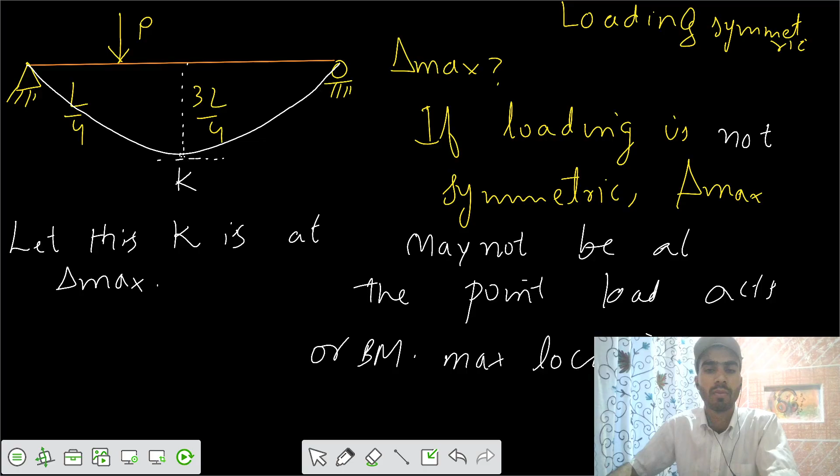delta is maximum. So if we make the BMD of this diagram, we can say this is the BMD of this diagram. So this is PAB by L. The equation is PAB by L. आपका A and B equals to PAB by L. That is 3PL by 16. And if you want to make the M by EI diagram, इसको डिवाइड करते हैं EI से।

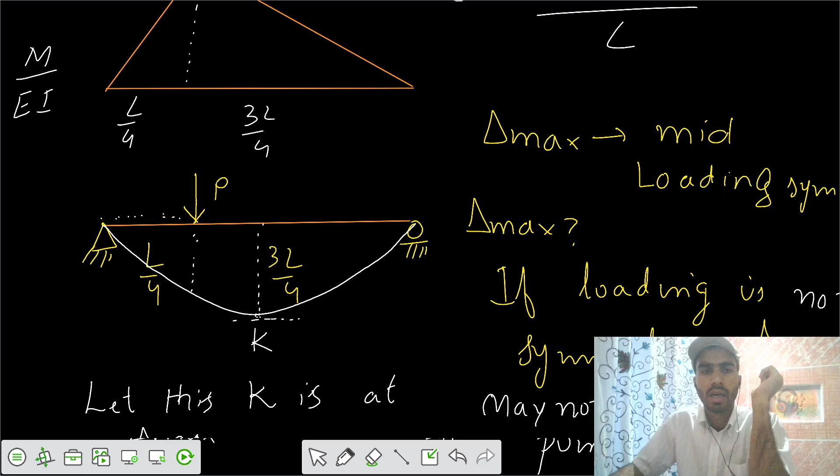So if we take that, let this point K be at a distance of x from this side. If we say यहाँ से कोई x पे आपका पॉइंट K होगा, then let's calculate the value of the BMD, M by EI value, at this point K.

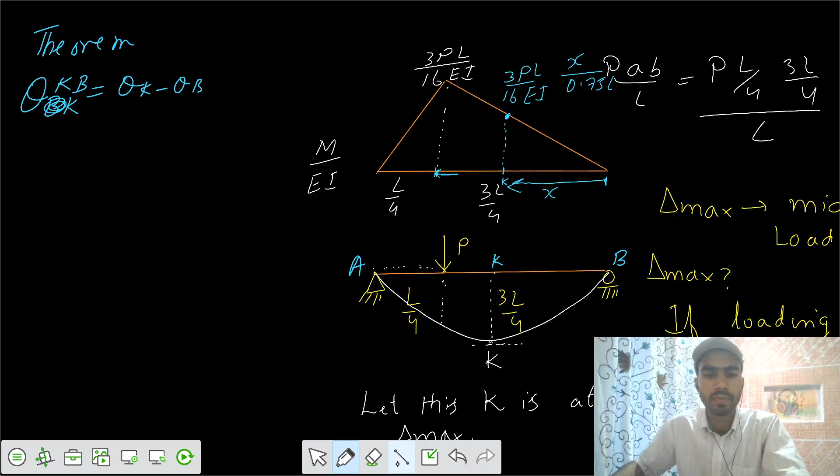Yeah, we can say theta. You draw a tangent from B, so this theta means theta K minus theta B. You can say it is theta at K with respect to the tangent drawn from B. Let's say we are drawing a tangent from B, देखते हैं क्या होता है. So if we make a tangent from B

such that this value is theta B, और at the location of point K theta would be 0 because delta maximum is there. तो theta is 0 because there the curve changes its path. So we can say this is theta at K with respect to the tangent drawn from B.

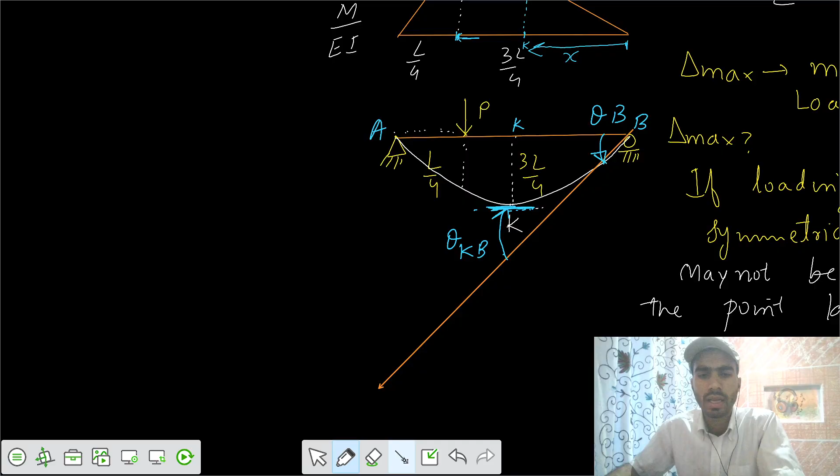Similarly, if we ask what's the area between the two points, theta K, theta KB, that's the area between the 2 points, and we can get the value that equals the area between the 2 points. That's the area, ये वाला area जो है ये आपको calculate करना है. तो we can say this is 1/2 3PL by 16 EI, and you have x into 0.75 x by 0.75 L, and आपका length जो है x मीटर. तो ये आपका 1/2 perpendicular into base, that's your area.

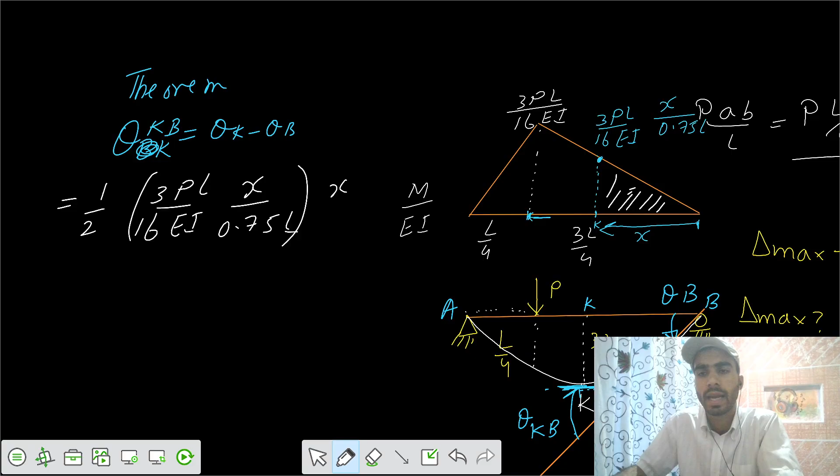But we don't know the value of x. How can we get the value of x? अगर आपको x पता चलेगा तो we can get the delta maximum. So we need to get the value of x anyhow. आपने theta KB find किया, but we should get some relation, and if we get one more relation, we can easily get the value of delta maximum. तो मैंने tangent डाल दिया, तो is there any possibility that we can get any relation?

See, I draw a tangent from B. What is the name of this delta, what can I call this delta? इसको हम कहते हैं delta at A with respect to the tangent drawn from B. What's the relation? In this triangle we have formed, delta AB, A with respect to B, equals tan theta, and because theta is small, tan theta equals theta. That's L theta B. ये आपका theta B है, and this is L, so we can say L theta equals delta AB.

So we got theta KB. We know that theta K is 0 actually. So theta B would be equal to minus theta KB. If we take the magnitude only, then we can say delta AB equals L times theta B magnitude. So we need to get delta AB. Deflection at A with respect to the tangent drawn from B equals area times centroidal distance from A. तो दो triangles का centroid देखना है, और उनको area से multiply करना है, then we can get delta AB. So let's calculate delta AB.

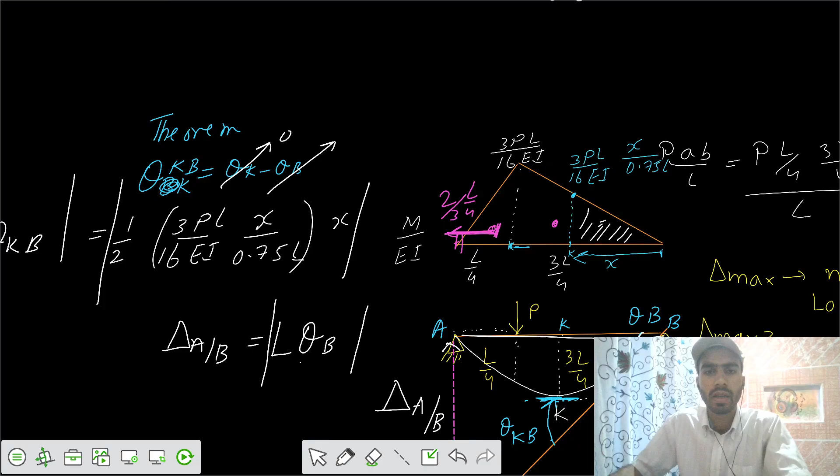But delta AB equals L times theta B. And we know that theta B magnitude equals 1/2 3PL by 16 EI and x square by 0.75 L. So we can write 5PL square by 128 EI equals 1/2 3PL by 16 EI and x square by 0.75 L. So we can get the value of x. x comes out to be root 5/4 of L, or 0.559 L.

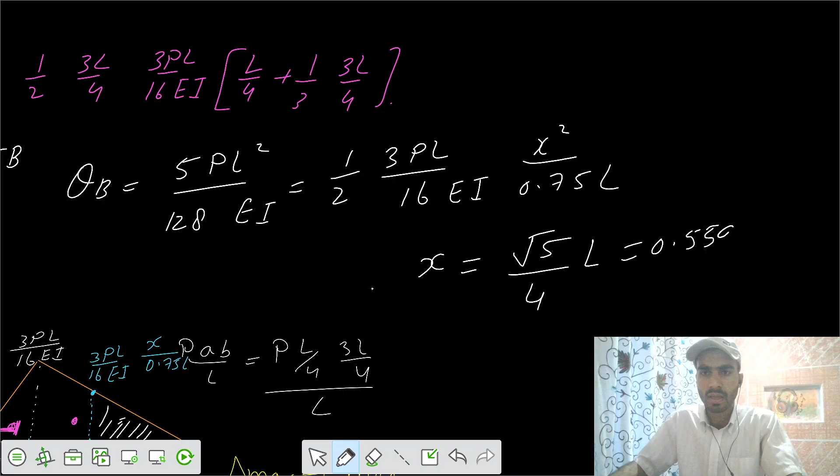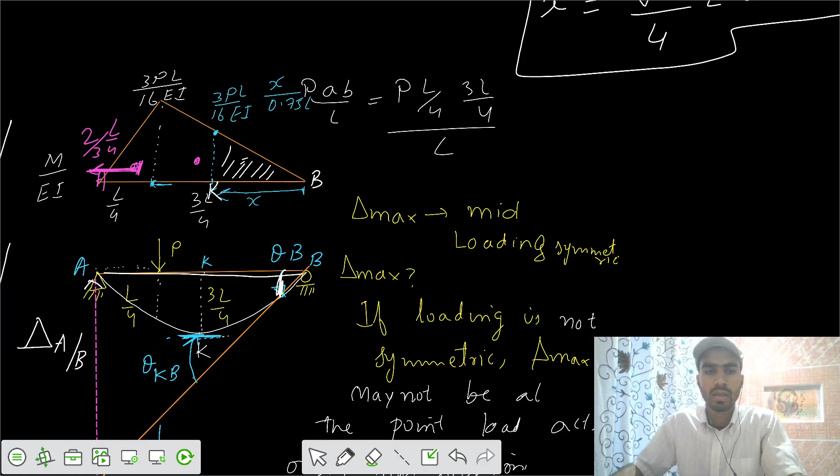0.559 L. So we got this value: आपका जो k पॉइंट है वो पॉइंट reference सपोर्ट B से at a distance of 0.559 L पे होगा, तो आपका delta maximum would be there and theta would be zero there. So to get the delta maximum now, we can say delta maximum.

We can now calculate: say you draw tangent from B and you say what's this value. You can say this value is delta. Can you tell me what is this total value? We can say this value comes out to be equal to delta at K with respect to tangent at B, but we don't need this value. Actually we need only this part, delta at K or delta max.

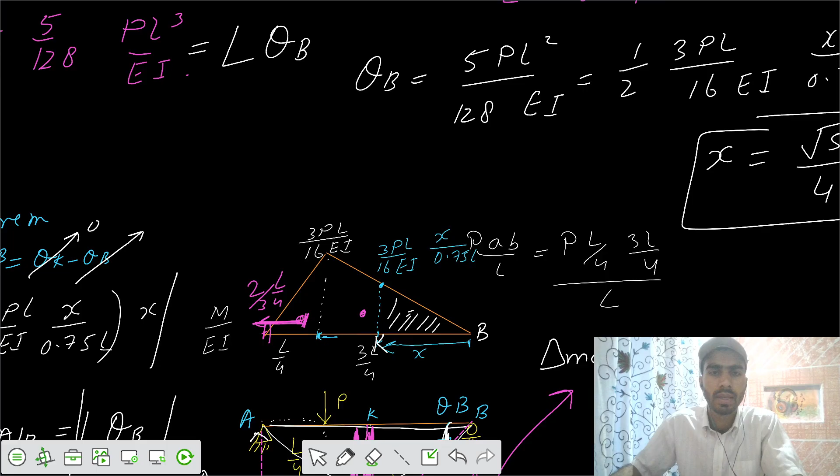तो इसको find करने के लिए let's make this deflection diagram again. Let's say this was the load at L by 4 and there was support B, this was A. So आपका K value is at 0.559 L, so this is length X, 0.559 L. तो यहाँ पे point K है, so can we say that theta here is 0? Here the theta is 0.

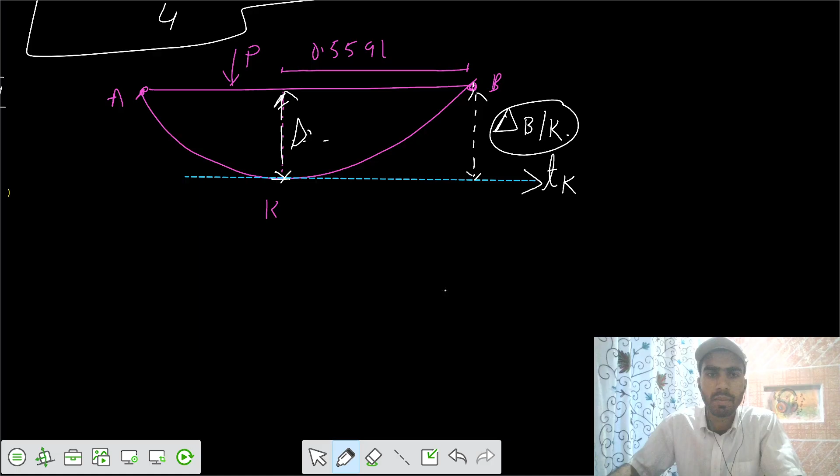If theta is 0 here, we can draw tangent from K and get the value of this one. We call this value delta, deflection at B with respect to tangent drawn from K. If we calculate this deflection at B with respect to K, that's also equal to delta max. So you need to calculate delta BK.

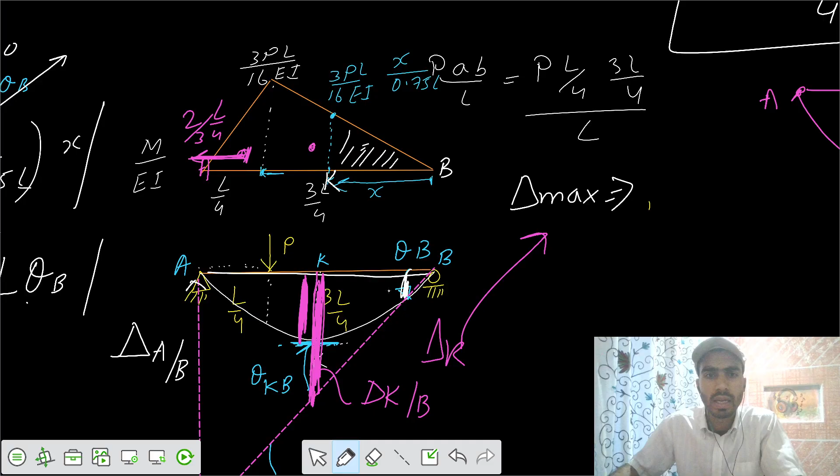For that, use moment area method, theorem 2. From this M by EI diagram, we need to get the value of delta BK. Delta BK equals area between the 2 points times centroidal distance about point B. So let's say this is the centroid, and this is the distance x_B bar. So we need the area of this triangle.

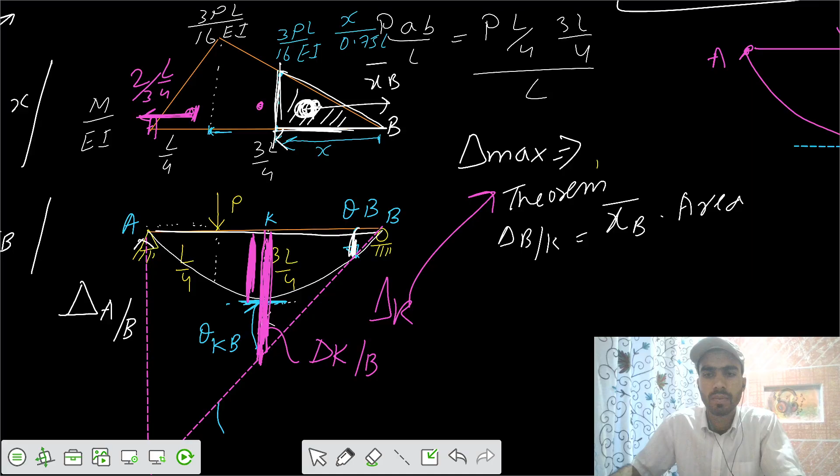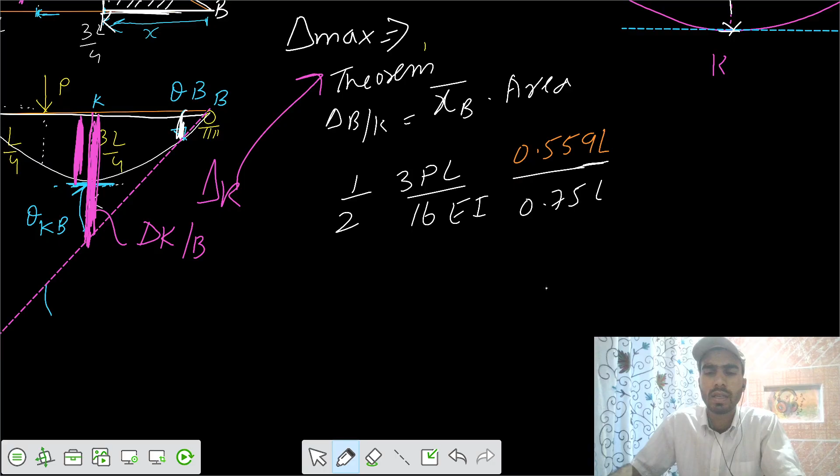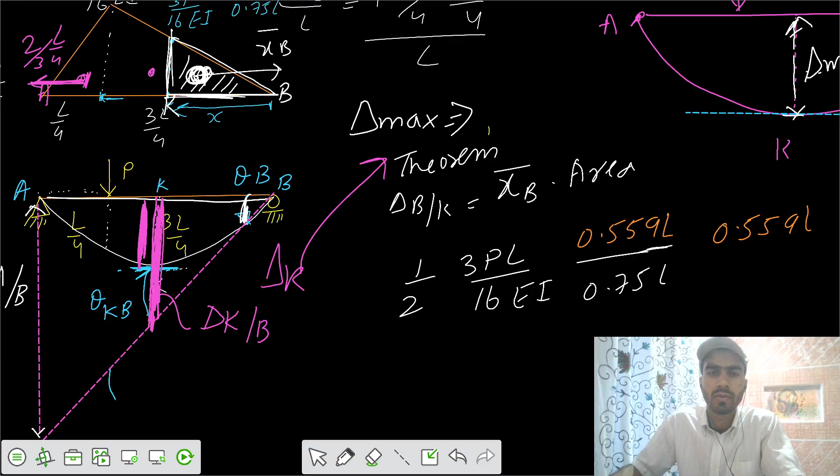We have the area of the triangle, 1 by 2 times 3PL by 16 EI. This was for length 0.75 L, but we have to get the value for x. X value आपका 0.559 L, then we multiply it with the length that is also 0.559 L. Then we have the centroidal distance. This is our area, with x equals 0.559 L.

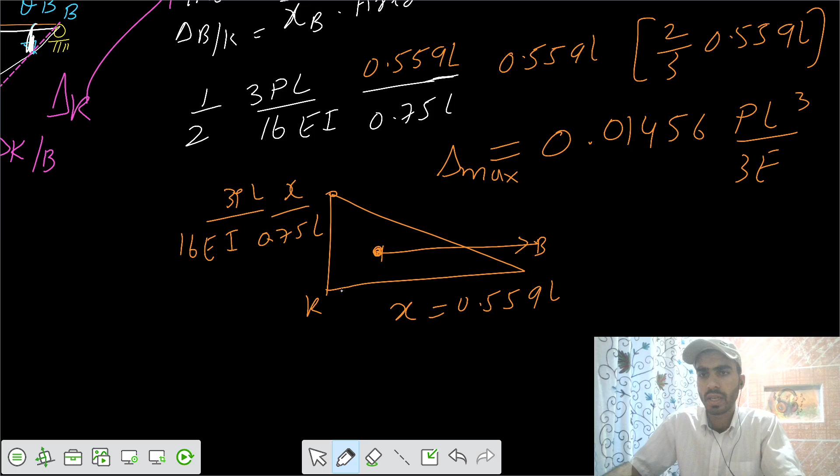यहाँ पे peak है 3PL by 16 EI, and you multiply by x and divide by 0.75 L. Then we have the centroid up to point B. This is point K, so the centroid is at a distance of 2/3 of 0.559 L. Finally you calculate and get delta maximum equals 0.01456 PL cube by EI. So this is the delta maximum.

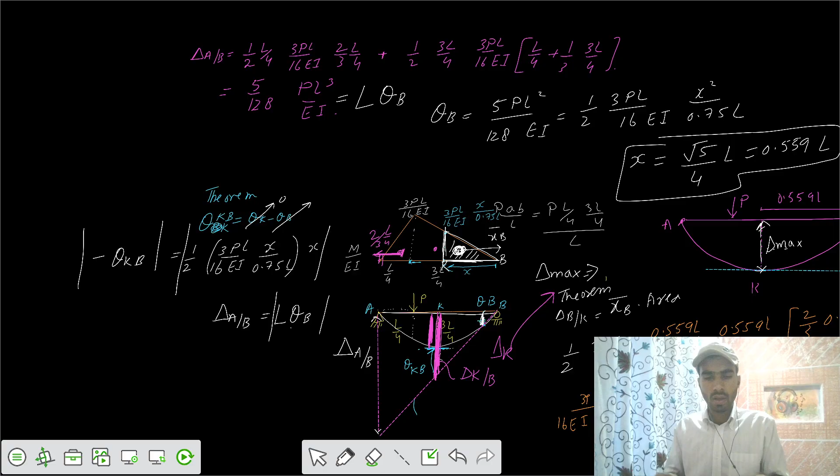I hope you got the problem concept fully. Let's take one more problem. You have a 14-meter beam. यहाँ पे support A and support at C, and a point load of 30 kilonewton acting at the free end, point D. We need to get delta at D, यानी D पे कितना deflection आएगा. Let's say this is 4 meter, ये 6 meter है और ये 4 meter.

Firstly you need the M by EI diagram, so we can see what the deflection profile looks like. Let's calculate the reactions. By summation of Fx and Fy, A plus C equals 180, and summation of moments about C equals 0. Then A equals 78 kilonewton and C equals 102 kilonewton. Since there are only point loads, it's easy to draw the BMD directly without a shear force diagram.

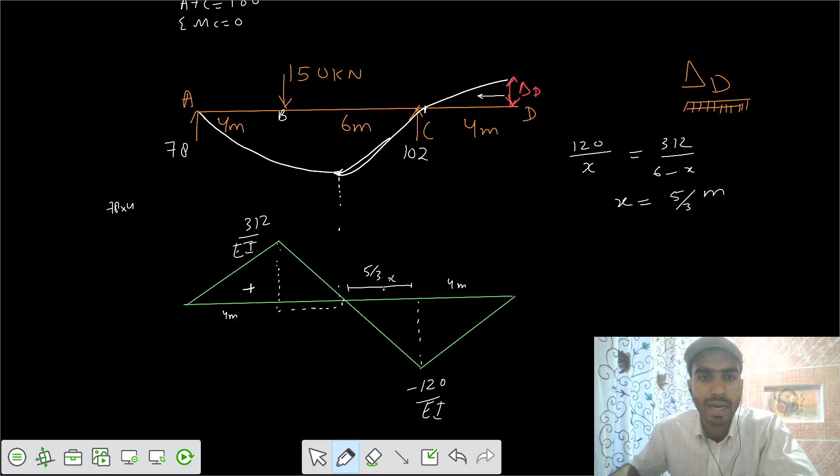So finally we need to get the value of delta D. So this is the delta D. So how can we get delta D? If you draw tangent from any point, see we don't know where delta maximum is. So if we draw tangent from here, theta at point A is also not known.

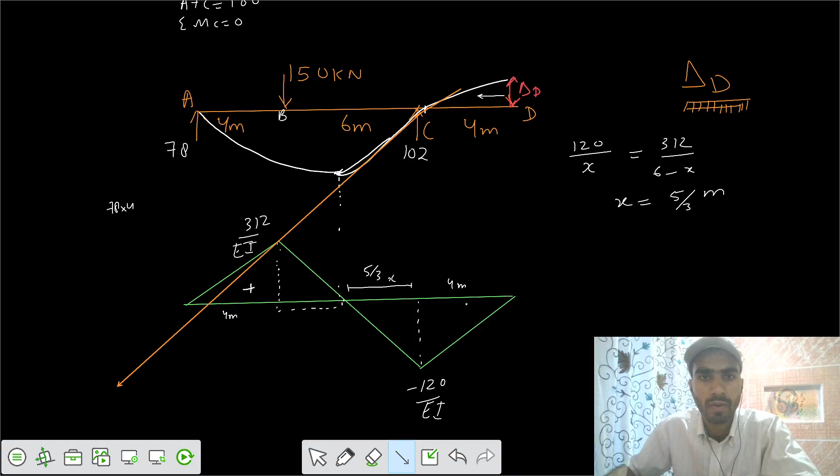And if you draw tangent from, say, we don't know this location where the theta is 0, or delta is maximum. So if you take one point common between the two spans, that's point C. If you draw tangent from C, there might be some relation between the two spans. So let's draw tangent from C. This is the tangent drawn from C.

So if we say what's the deflection value of that, we will call this value this deflection value, and we have one more deflection value, this one. This value is the deflection at A with respect to tangent drawn from C, and this value is the deflection at D with respect to the tangent drawn from C. So point D has reached here. So from that point we say deflection at D with respect to tangent drawn from C.

We can get these two values. If I know what is the total value of this one, let's call it alpha. If I know alpha, we can get delta D. So we can write delta D equals to alpha minus delta DC. So somehow if I get alpha and delta DC, you can get delta D, the deflection at D.

So the deflection at D with respect to C is easy. We can get that from the area between the two, and the centroid distance from point D. That's easy. So let's calculate that part first. That's very easy now. Let's go for that.

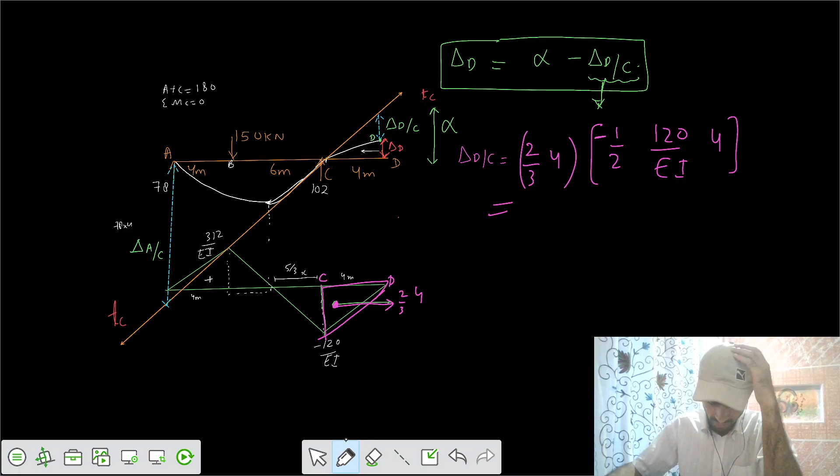So this was point C. So this is the area between the 2 points, and the centroid is acting here. So finally delta DC equals this value, but overall value is negative. You can keep the negative sign also. So you can calculate it, delta DC comes out to be equal to minus 640 by EI.

Negative means that point D, delta D, means point D is below reference point C. But in the diagram, actually point D has reached upwards. Can you see that? Delta D has reached upwards when we made the diagram. That means the direction you assumed is not correct for that point D.

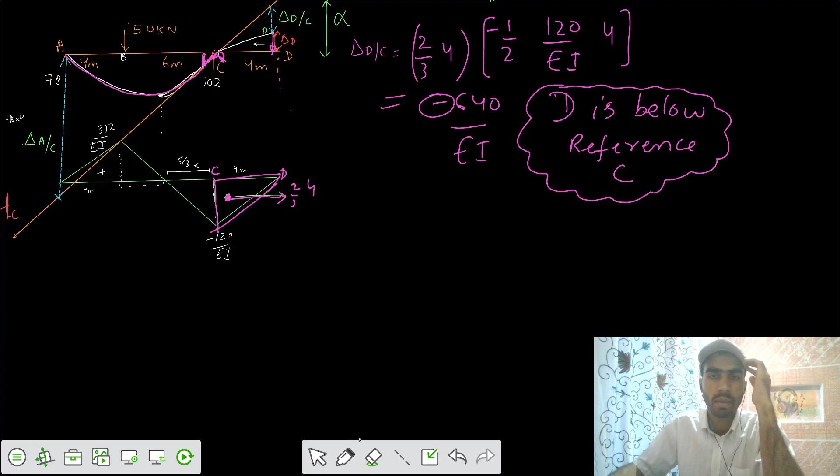So actually it should be deflecting in this fashion, to maintain the slope, theta left equals theta right, but it would deflect downwards because there was some point load here. That's why negative has come here. But for calculation analysis, we say that delta should be upwards, then we draw tangent from both the points to get the value of delta. So finally, D is below reference point C. That means deflection at D is downwards by an amount of 640 by EI. Did you get this?

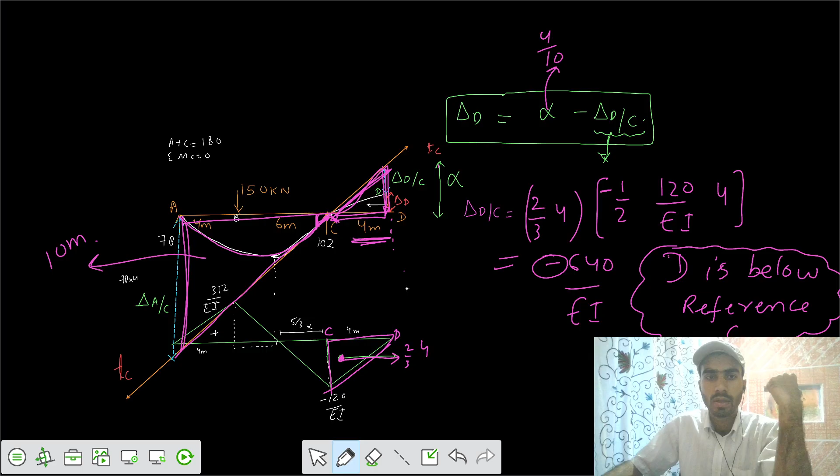Now finally we got delta DC. What should be the value of alpha? See, we have two similar triangles: this triangle is for 4 meter, and this same triangle is for 10 meter. So alpha is 4 by 10 of delta at A with respect to point C. So we need to get the deflection at A with respect to C anyhow. So we need to calculate delta AC.

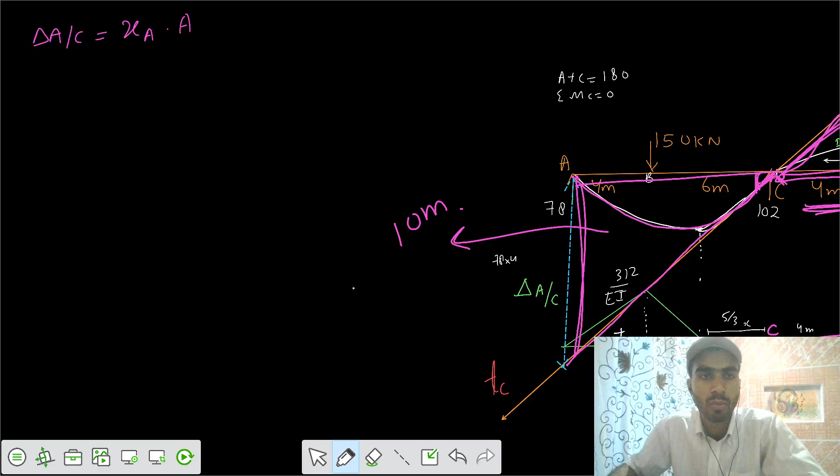Calculating delta A with respect to C. That's moment of area about point A into area. So we can see how many areas we have about point A between A and C. We have one area, next one, and next one. 3 areas we have. This is negative area. This is positive. So let's take this one as centroid 1, this one centroid 2, this one centroid 3.

So we get centroid 1 at a distance of 2/3 of 4, and the second centroid is at a distance of 4 plus this one; the first one is 5 by 3, so this is 6 minus 5 by 3. That's 18 minus 5 by 3, 13 by 3. We can write 1/3 of 13 by 3. Then we can get the value of third centroid from point A. We can directly say the overall length up to here is 10 minus this distance, which equals 1/3 of 5 by 3.

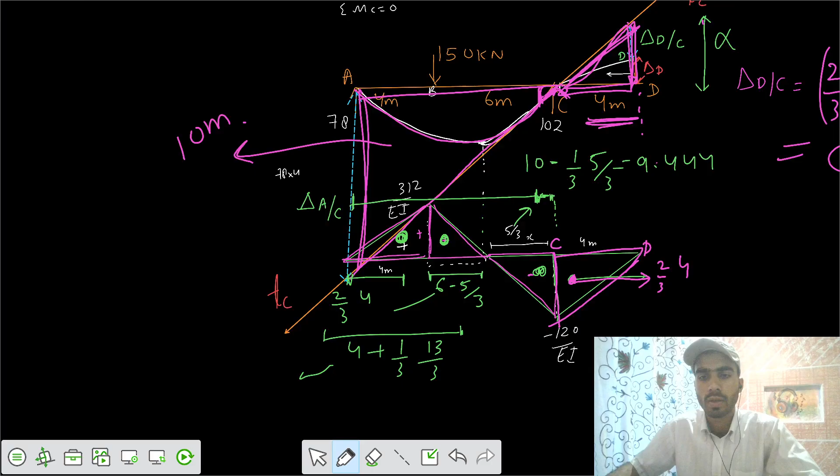So finally we got this value, this one, and we have this one and this one. So इनको substitute करते हैं, and we multiply with the area. So first area we can calculate 1 by 2, 312 by EI for length of 4 meter. And centroid act करता है कहाँ पे 2 by third of 4, that's 8 by 3, 8 by 3 plus next area 1 by 2, 312 by EI into length.

How much length is this? This is 6 minus 5 by 3 total length. So we can write 13 by 3. So the centroid is acting at 4 plus 1 by third of 13 by 3. This centroid. And third one, after that we have next area, that's negative area, negative triangle, that we can write 1 by 2, minus 120 by EI, and length is 5 by 3, or the centroid is acting at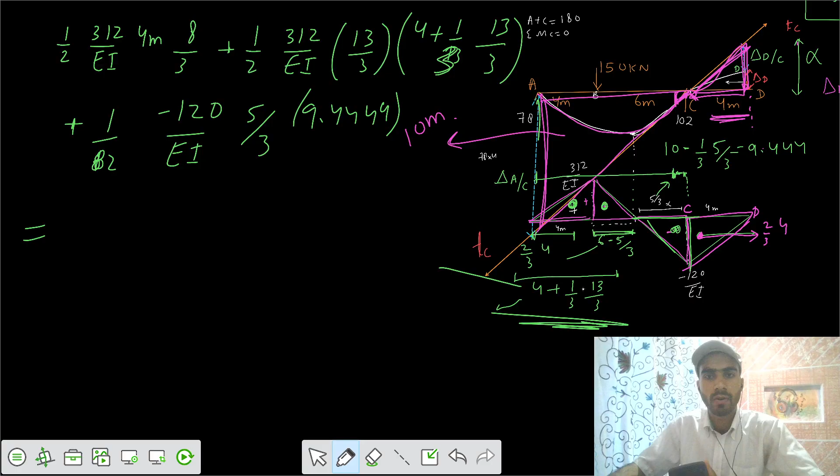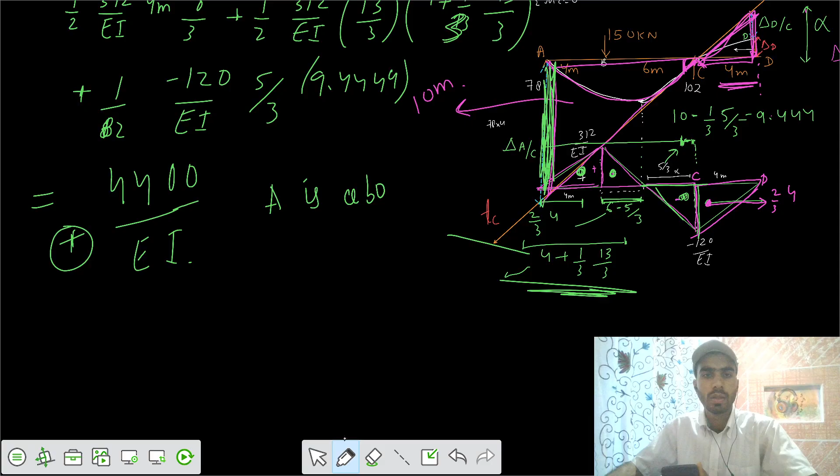9.4444. So finally you substitute the values and you can get the value of delta at A with respect to the tangent drawn from C. This value we can get equals to 4400 by EI. 4400 by EI. Positive here. That's point A is above the tangent drawn from C, above reference point C. The tangent drawn from C is down, and point A is upwards.

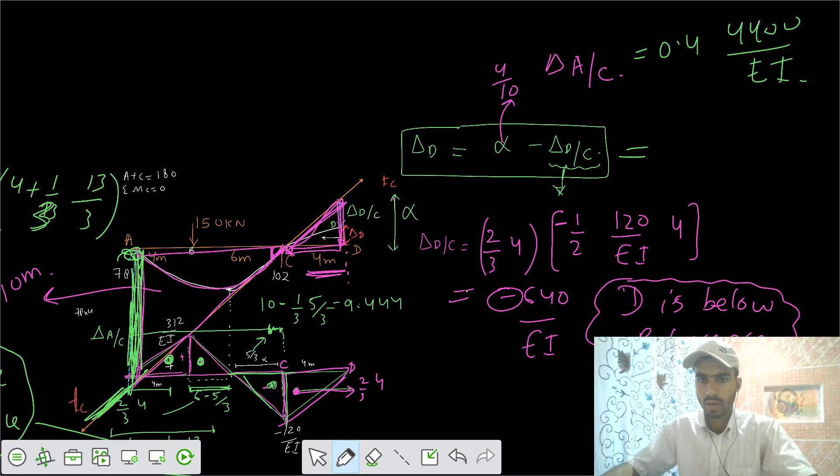So from the similar triangles we can say now the value of alpha is equal to 0.4 of the value we got, 4400 by EI. And finally delta D equals the difference of the two. So finally your delta D comes out to be equal to 1120 by EI, positive. So this was a very good problem.

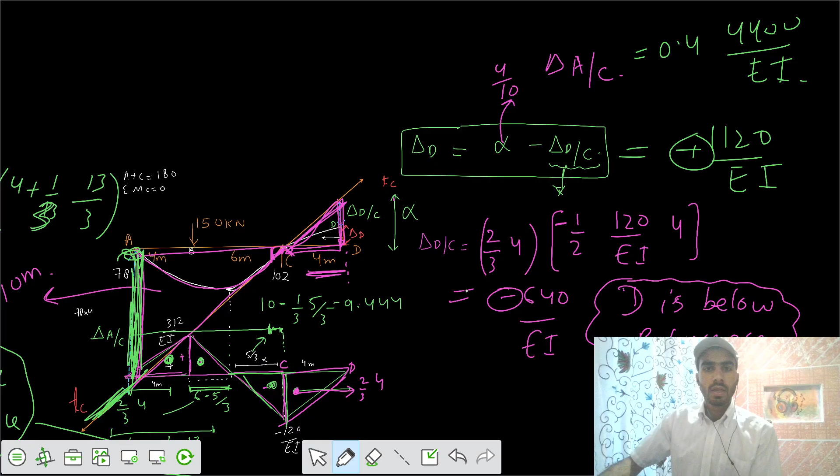We can calculate this same problem by another method. Let's keep this problem aside for now. We can solve this problem again by using a different method. Now next one is the same method I was telling. This method is called moment area method. But it is moment area method where we do BMD by parts, bending moment diagram by parts.

Say you have this beam, दो मीटर तक आपका UDL एक्ट कर रहा है, और इसके बाद 1 मीटर that's free. So we have 300 kilonewton per meter acting. So we can get the reactions at point A and point B. After calculating, reaction we have 200. This one is 400 reaction.

So let's say we want to make bending moment diagram. In this part there would be linear variation. After that, there is a decrease in BMD because SFD is downwards, so we have some 2-degree curve. Let's keep this 2-degree curve, and this is 1-degree curve. So this is your BMD. If you divide it by EI, to calculate the centroids and area, if calculation of area and centroid is difficult, we go with this method.

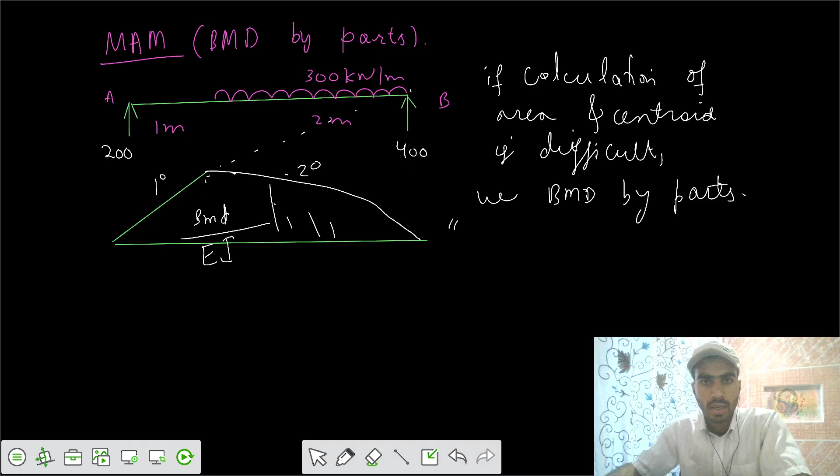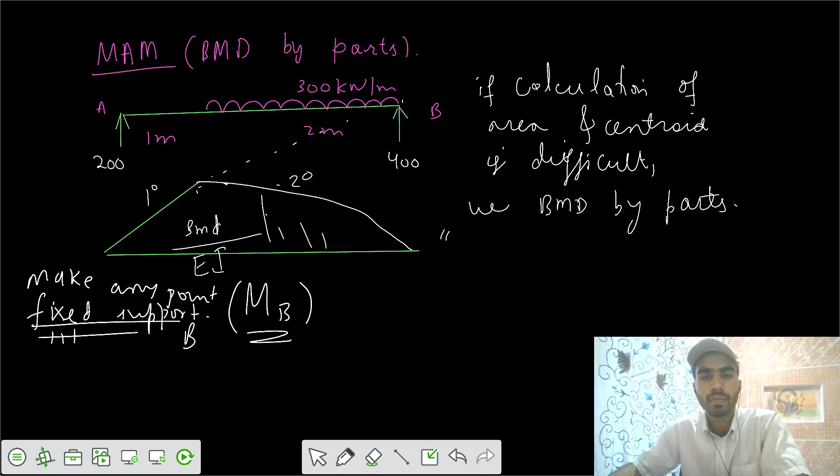So it says make any point fixed, fixed support, इसको fixed बना दो, फिर वहां पे आपका मोमेंट कैलकुलेशन करना है. Let's say point B, we calculate moments about point B. So let's make point B as fixed. So this was the same beam, but you made point B fixed.

Point B fixed. Then what is the effect of this point load 200 upwards? That's the reaction. If load is upwards, the moment developed would be clockwise. That's positive moment, and that equals 200 into length L. That's 600. And if you divide by EI, you get M by EI diagram. Then you join the 2 points by straight line. So this is your first M by EI value about point B.

Similarly, you have a UDL also. This UDL is acting after this span, 2 meter span. If you want to say what's the variation of this, because this is UDL, we had parabolic variation this way.

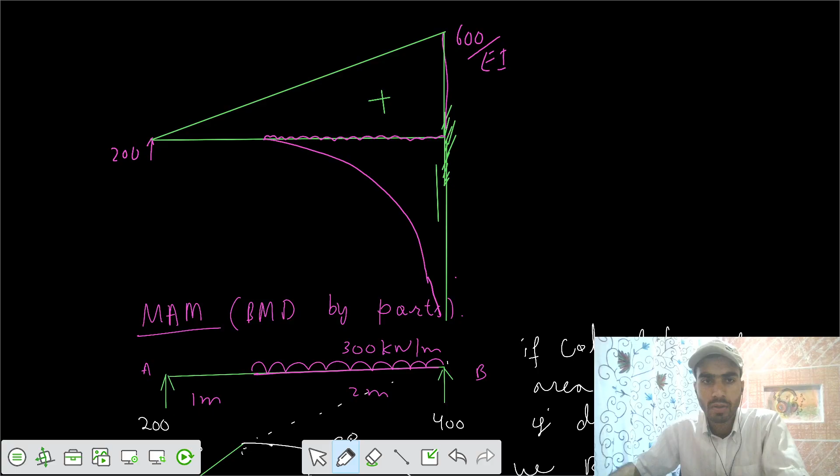We can say this value equals WL square by 2 or WX square by 2, where W is 300 and X is 2 meters, on which this UDL is acting. UDL 2 meter pe act kar raha hai, so 300 into 2 square by 2 equals 600. But it is negative. The concept behind making any point fixed is that moments should be balanced about that point, or the moments should be the same.

Point B was a simple support, to yahan pe moment aapka 0 hota hai. Moment at a simply supported beam at the end is 0, so moment at B equals 0. By this method also, the final value of bending moment at B is 0: one is positive 600, the other is negative 600. So now calculation has become very easy.

This is area 1, its centroid is here, and this is area 2 with its centroid here. Area 1 is 1 by 2 into length 3 meters into 600 by EI. Area 2 is 1 by 3 of 600 by EI for a length of 2 meters, but it's negative. So we get areas directly, and the centroids are L by 3 and X by 4. That is how this method works.

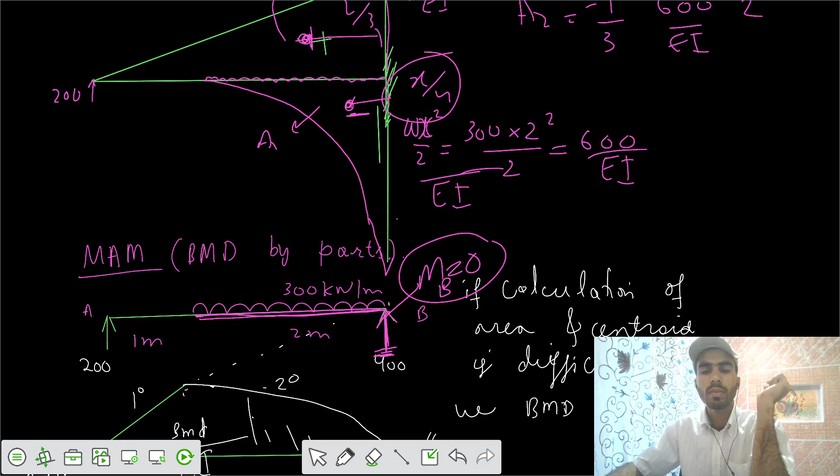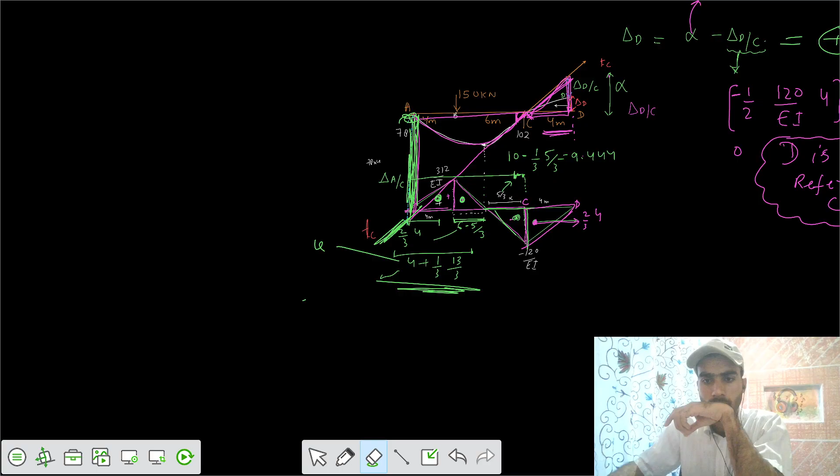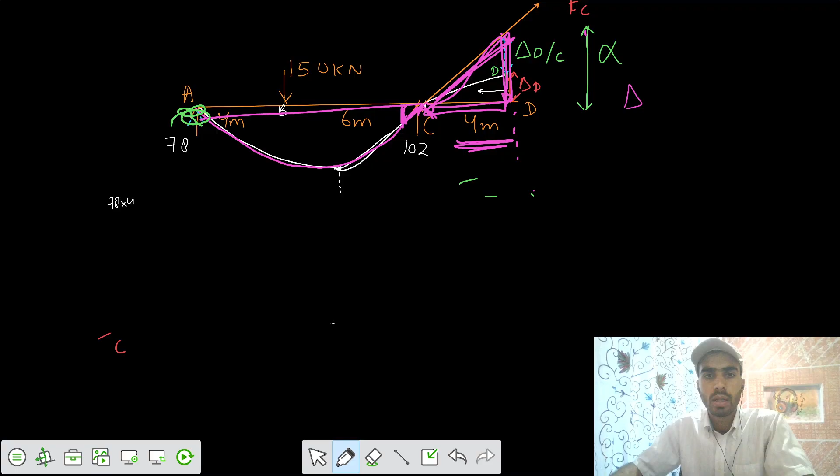Now let's see the previous question we did, and do its calculation in the same way. Let's make point C fixed, because at point C we drew the tangent, and we got relation 1: alpha equals 4 by 10 of delta at A with respect to point C. So we make point C fixed from both sides.

From here the reaction is 78 upwards. Then you have 150 here and 150 here. Doing separate calculations, 78 into length of 10 meters is 780, and similarly from here 150 into 6 meters is 900, negative. So we write 780 by EI, positive value. This part is also linear variation: 150 into 6, 900 by EI.

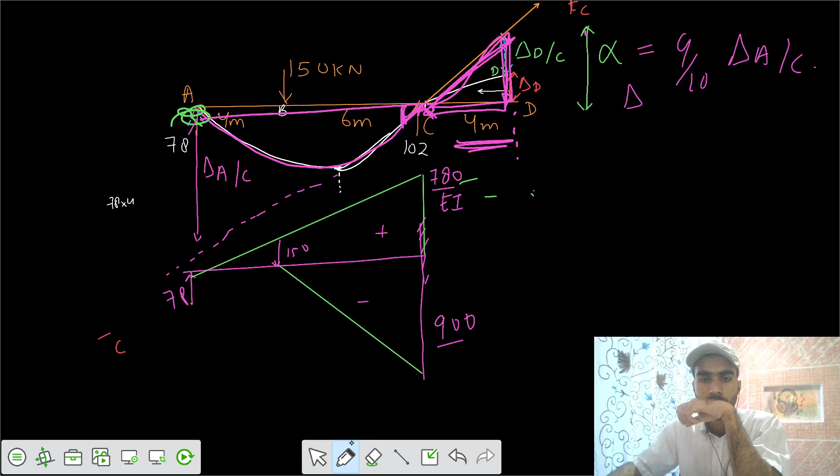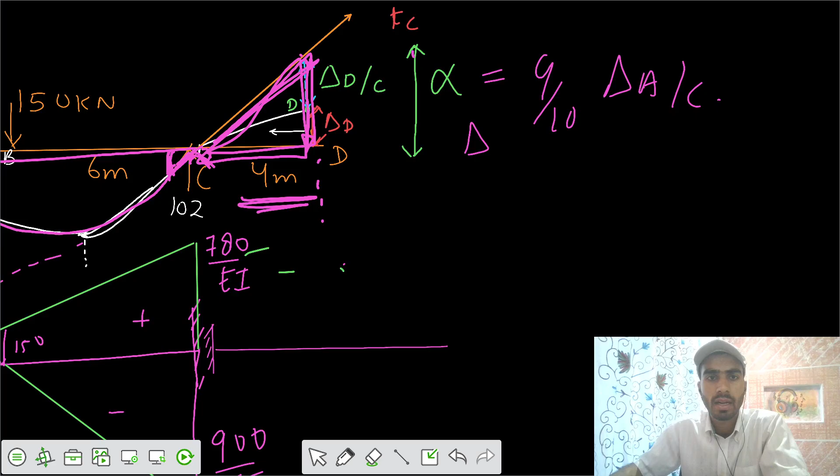Similarly, make point C fixed again, but calculate from the right side. A point load was acting at D, 30 kilonewton. Its effect is an anticlockwise moment of 30 into 4, that's 120, so minus 120 by EI.

Now to calculate delta at A with respect to C, take point A and point C and calculate the area between the two points: area 1 and area 2. Area 1 into its centroid about point A, and area 2 into its centroid about point A. So we finally get delta AC.

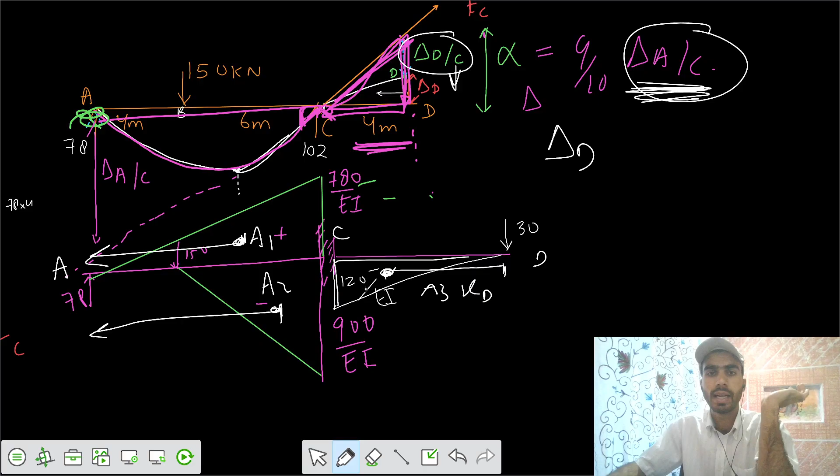Then we need delta DC: get the area and its centroid, and multiply about point D. This is area 3 into XD. So finally we get delta D. This is a very important method when calculations are very lengthy.

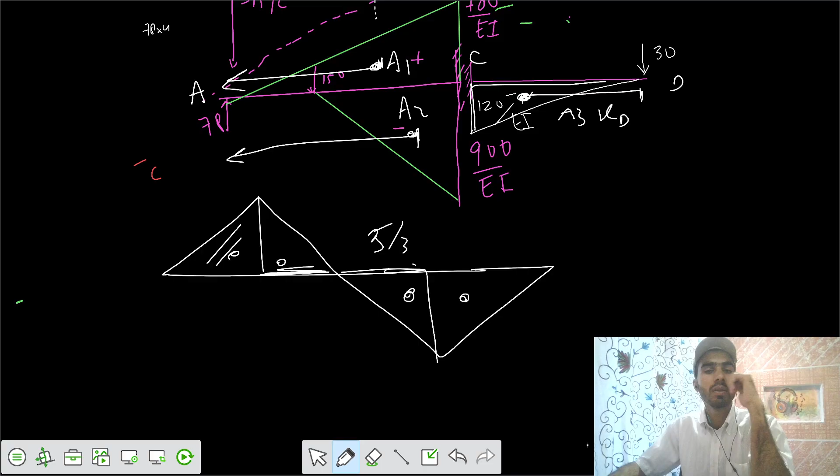In the previous part we had a bending moment diagram like this. You needed area 1, then the length, 5/3, then each centroid. It took a lot of calculation, and this method minimizes those calculations when the bending moment diagram area is difficult to find or the centroid calculations are lengthy.

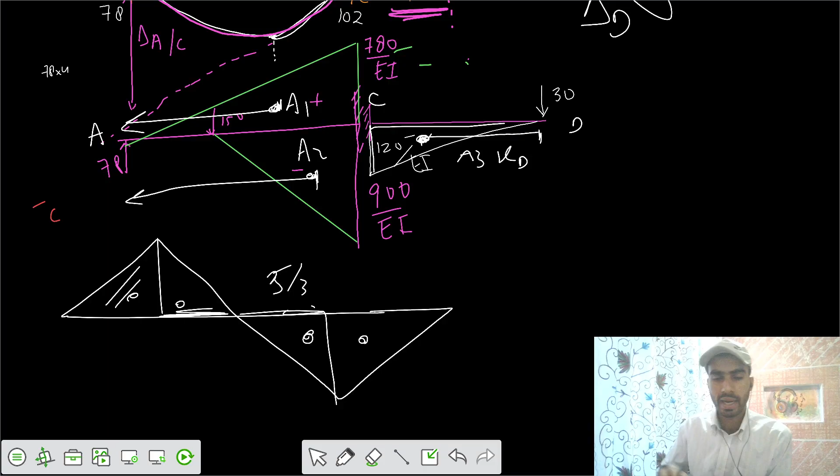Let's do one last problem on the moment area method, using the same concept of bending moment diagram by parts. You have this beam.

Uniformly varying load after length L/2. So this is length L/2. This is also length L/2. Uniform load acting, uniform load. So this is your W. Okay, this is W.

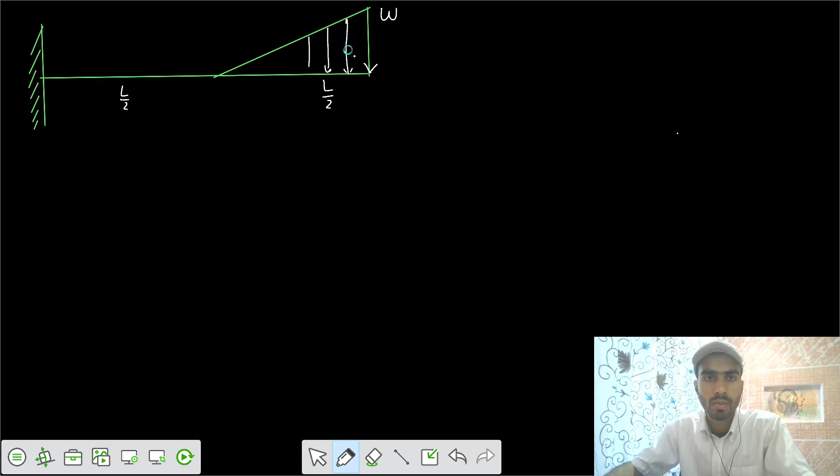So yesterday at the end of the lecture we saw that you had this one, then iska value of bending moment diagram, that's somewhat this way. We know that WL square by 2 divided by EI. Then we have centroid also, we know centroid also. Similarly for this one also, then we say iska bhi value kuch hai WL square by 6, I think ऐसा कुछ होगा. And centroid we can say this is 2 degree, this is 3 degree.

Then we were having this problem, ये वाला problem था आपका. So इसको हमने बोला कि let's make it as an equivalent UDL, then subtract by the same amount. This is downwards, this is upwards, W. Similarly this problem is same, but here in this first part of length there is no load. So let's extend it to make it as a UDL. इसको UDL बनाते हैं. So this is downwards UDL.

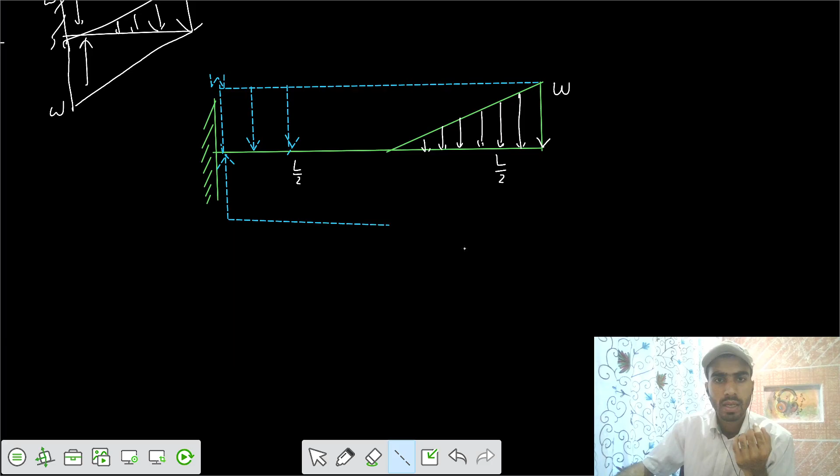So finally we got this UDL downwards, but we have to subtract also that same value of UDL. Let's say this was W, this was W. So we had to subtract the same value of W from the downside. So we had to apply upwards load of W. So up to this point, see, there was a UDL acting that you applied, a pseudo W acting for the entire length L/2.

Then after that, you have linear variation. You have linearly applied that from W to 0. So this is the variation. But still, the mystery has not been solved. So we can say this part has again come into picture. How can we remove this? So if we kind of extend it to make it as an equivalent UDL in this fashion, let's make it in this fashion also.

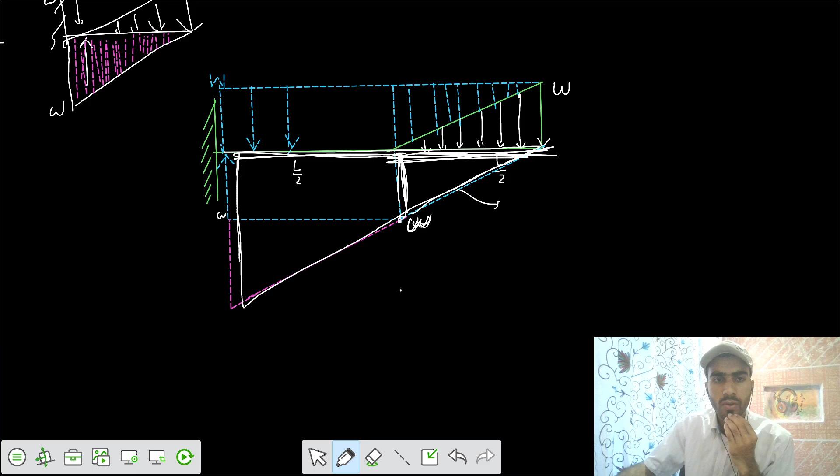So if you want to make it in this fashion, you have to extend it by some amount. Say if this value here is W for length L/2, so in this triangle, जो ये triangle है आपका, we know from similar triangles, अगर यहाँ पे आपका W था for length L/2, so if you want to make the similar triangle for length of L, you have to take this equivalent as 2W from here to here. Understand?

So you can say up to this point, this was equal to W. Correct, this was W, and after that we have one more W. But you have to apply it again in the opposite direction. Say you are applying it upwards. Reference line से नीचे जो है that's acting upwards, and जो reference line के ऊपर है that's acting downwards. So same amount you have to apply in the opposite direction.

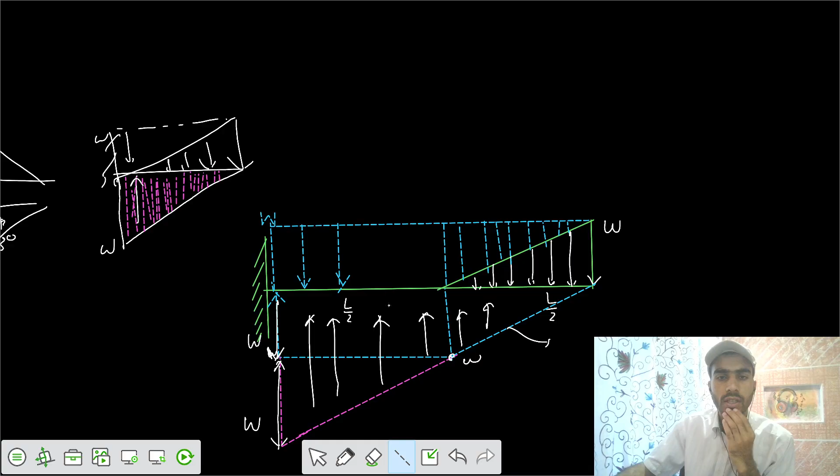Here you are applying 0, and after that you are applying a W intensity at the support. So this value is also W. This is downwards. So the final diagram looks like this. So equivalent load, यहाँ पे आपका एक triangle बन रहा है, then a UDL, then a triangle. So here the intensity is finally 2W, here the intensity is W, and intensity is W downwards.

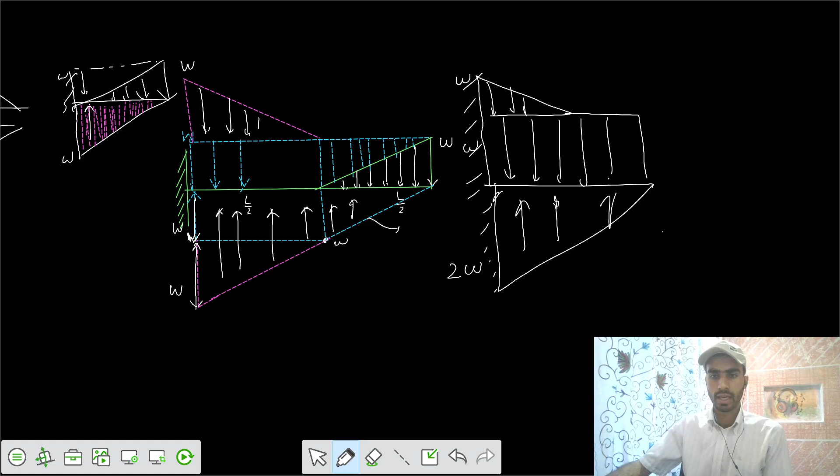So you had this this way. You have to get how much moment is developed at point A. So we know that these are the three diagrams. We know the centroids and the calculation of area.

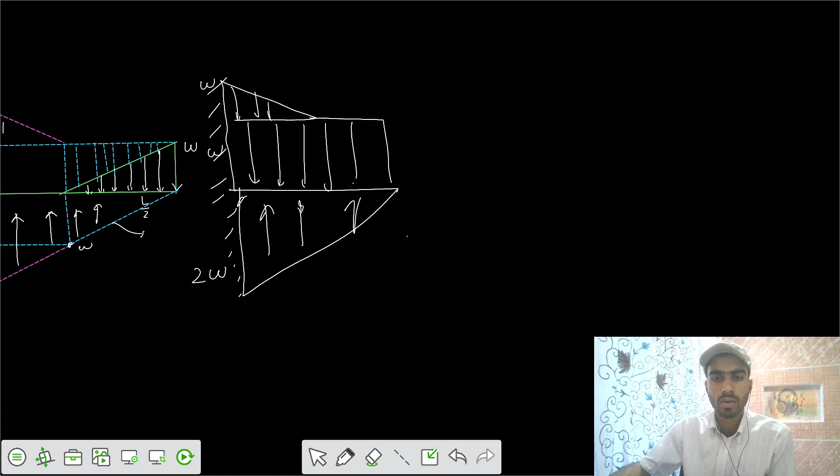Let's say we want to find the total values of those areas. Let's take this point as reference. Because of this UDL, it's creating clockwise, so there will be a negative moment developed at the support, negative WL square by 2. So we can write WL square by 2, and the variation would be parabolic up to the length L. So this is 2 degree, WL square by 2.

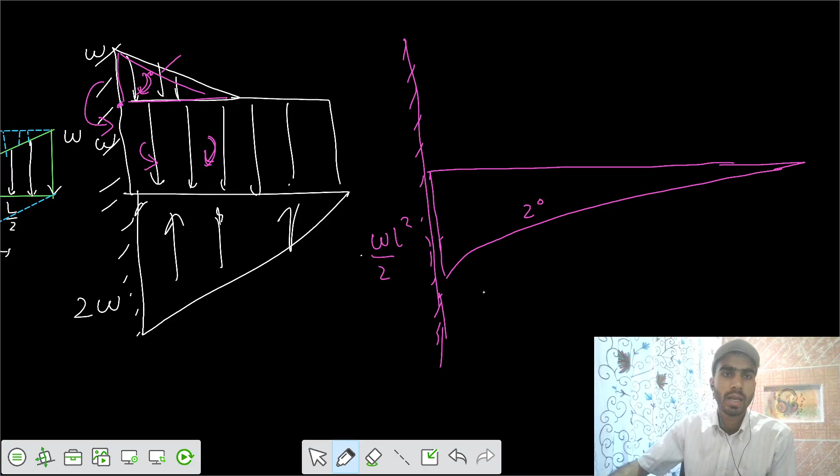Similarly, from the upper triangle for length L/2, you have clockwise moment developed about the support, so there would be anti-clockwise, so again a negative value of M. The value of this one would be 1/2 W L/2. This is the value of shear force, and it's acting at 1/3 of L/2. So finally you can get WL square by 24 up to the length L/2. So you have negative WL square by 24 in a 3 degree curve.

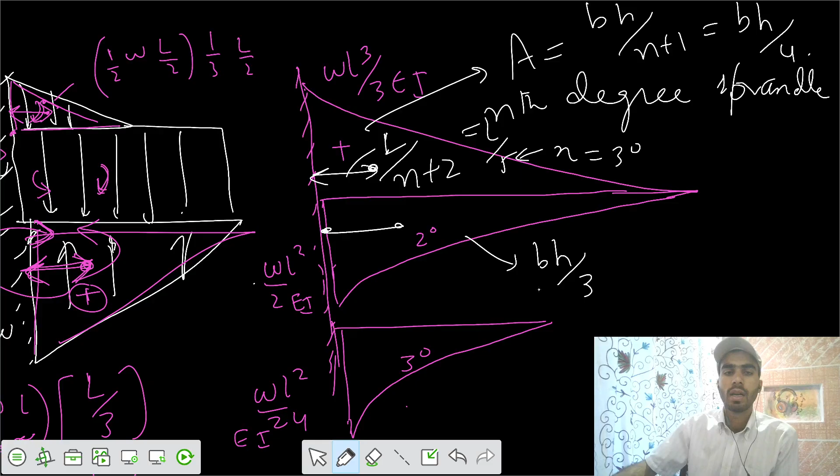3EI. We know the centroid calculations for the nth degree spandrel: this value comes out to be L by n plus 2. The degree n equals 3 here, so that's L by 5. And the area for the 3 degree is BH by n plus 1, that's BH by 4. And for the 2 degree, area equals BH by 3. Centroid is at L by 2 plus 2, that's L by 4. So we can get the values of these.

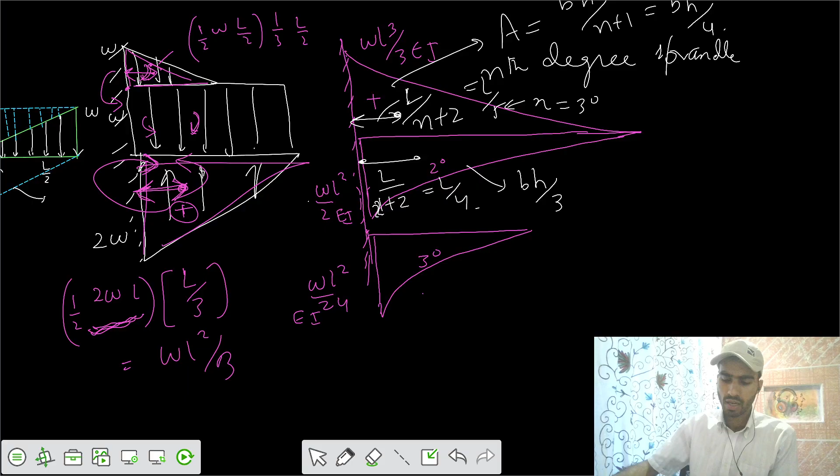The question was actually to get the deflection at B. Say this is point A, this is point B. Load is applied, so deflection would be somewhat this way. If you draw a tangent from A, this is the deflection at B with respect to the tangent drawn from A, also called the deflection at B. So to get it, take the total area between the 2 points and calculate the centroid about point B.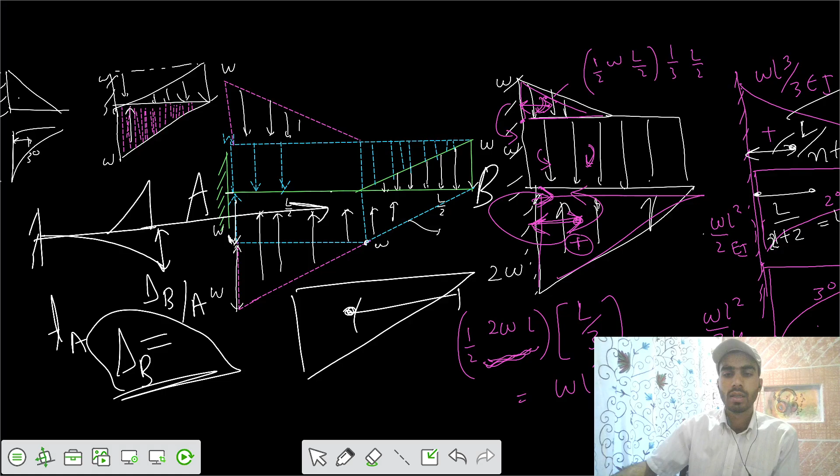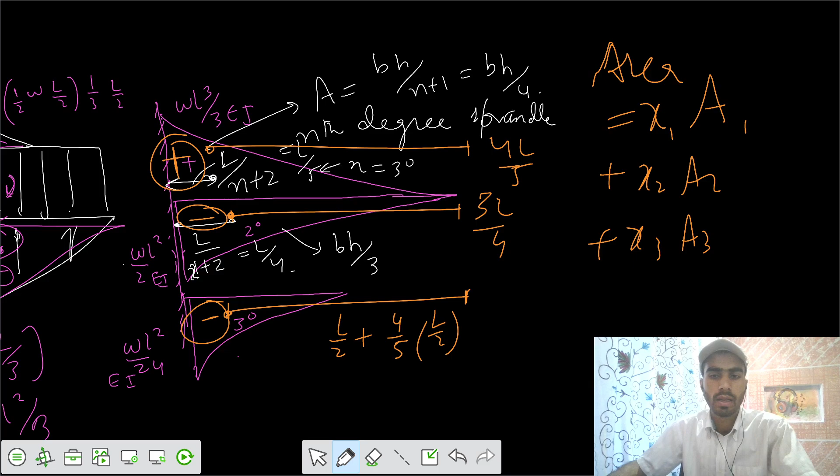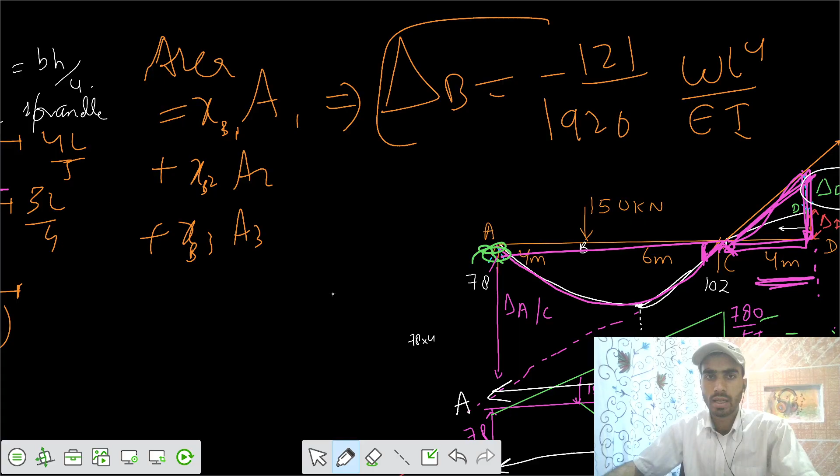So the centroid calculation about point B: here it's L by 2 plus, for 3 degree, L by 5. So we can say 4 by 5 of L by 2. Similarly for this one, that's 3L by 4. And for this one, that's 4L by 5. And the areas we know: this is a positive area, this is a negative area, this is also negative. Multiply with the centroids about point B, and the final deflection at B equals minus 121 by 1920 WL to the power 4 by EI. You can try it yourselves.

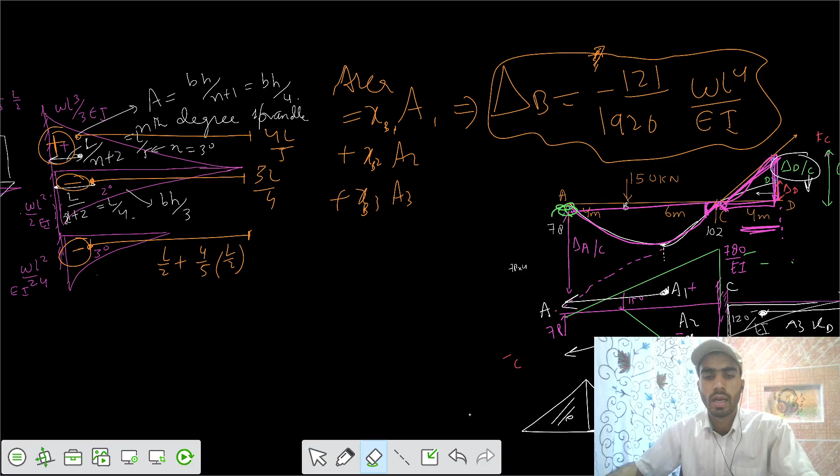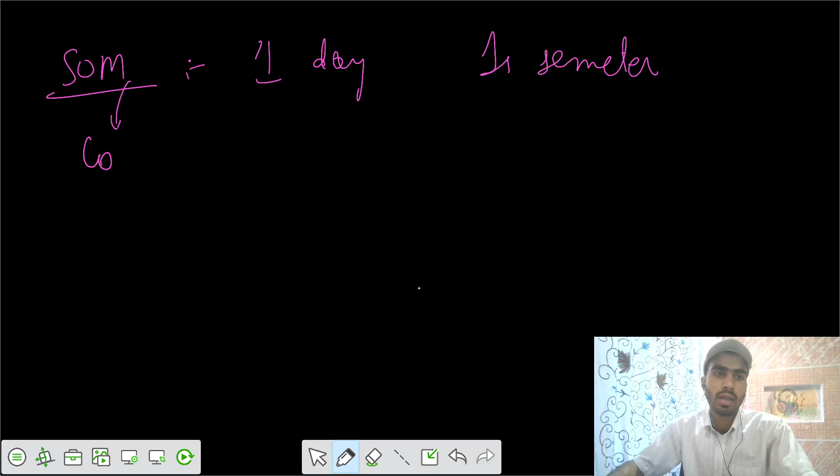You have to practice yourselves also to make your strength of materials strong. SOM is not a subject of 1 day or 1 semester. It's a continuous process; you have to grow in SOM every single day throughout your career.

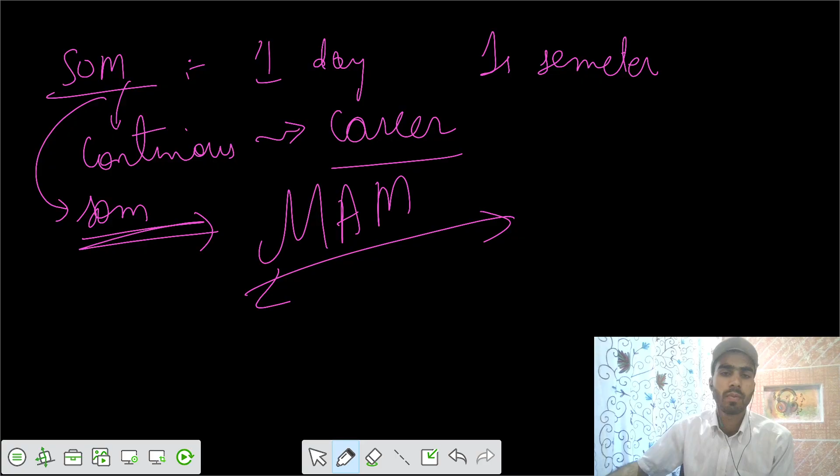So this was the end of the moment area method. We have already solved a lot of problems in the previous lectures, and these 2, 3, 4 problems were also important for this lecture. So that's all from the moment area method.